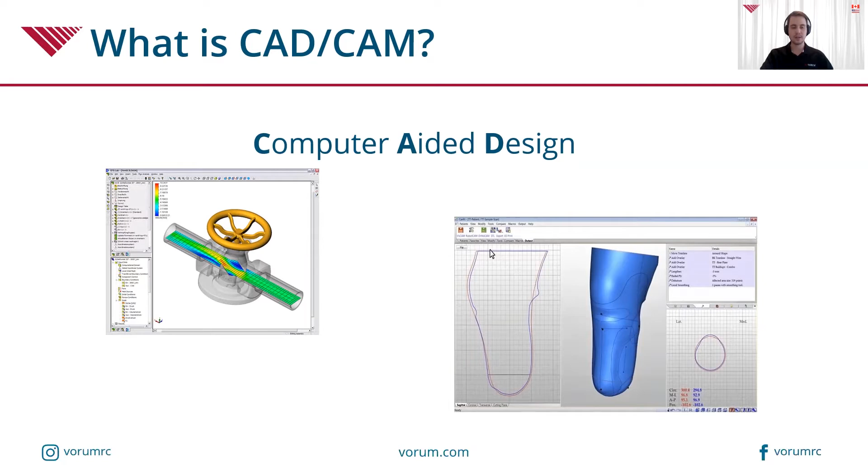Engineers use CAD to model all sorts of things, including fluid flowing from a valve or through a valve. Architects use it to draw and modify things instead of drawing them by hand. And O&P professionals use CAD to design all sorts of different custom orthotic and prosthetic devices.

CAM simply means it's the next step in the process. It means computer-aided manufacturing. CAM programs take the digital shape file from the CAD program and translate it into directions for a machine to follow. Since different machines have different numbers of axes with different dimensions and orientations, it's actually quite critical that the CAM program has been calibrated for the specific machine that it is talking to.

In 3D printing, CAM software is often referred to as slicer software. Together, these form the foundation of a new workflow or even a new business model.

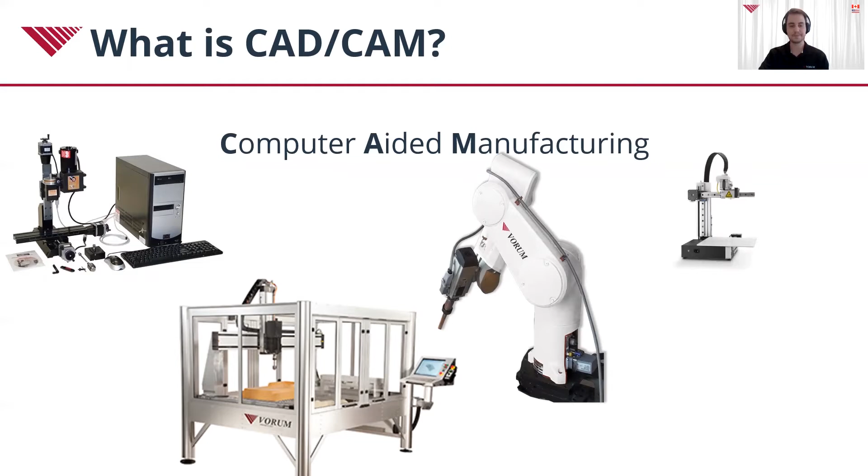As I mentioned, there will be survey results along the way. So we partnered with Dimensional Research. They are an independent third party that specializes in market research to do this survey on our behalf.

So this is especially relevant during and post-COVID. What we've seen is shutdowns, lockdowns. We've had our clients close their business for specific periods of time.

Even though they were deemed essential services, they thought it was best to protect their staff, to protect their patients, and close down.

From the patient side of things, people were reluctant to go outside, to go seek care. People just didn't understand how this virus is transmitted, ways to protect themselves. Now that we're learning more and more about it, people are more willing to go get care. There were surgeries that were not deemed emergency surgeries a few months ago, now they're becoming emergency surgeries. So those patients, they need care as well.

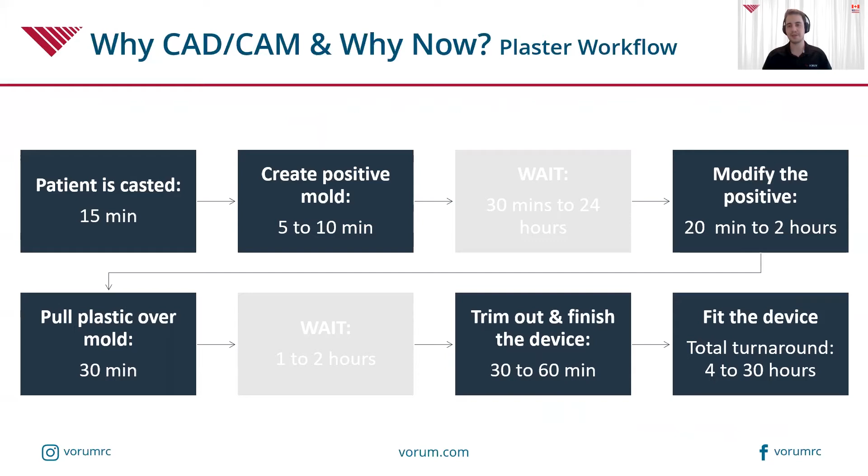When comparing this to the conventional CAD/CAM workflow, we can scan a patient in 2 to 5 minutes, maybe even faster than that, 2 minutes. You can modify that shape and fit it anywhere from 2 to 20 minutes.

New users might say, well, 2 to 20 minutes, I've seen CAD before and it's going to take me a little longer than that. We have our SurePath program that we're going to talk to you about - if you want to be able to modify an AFO in 15 minutes and that's your goal, we'll get you there. We'll do whatever we can to ensure that you achieve that marking.

From there, you carve that shape in 12 to 20 minutes, pull the plastic, wait for it to cool, trim it out, and then you can fit it all in around 3.5 to 5 hours. So for those rural communities, or patients not taking a full day off of work, they're not spending overnight in a hotel - they can get a device in 3 to 5 hours.

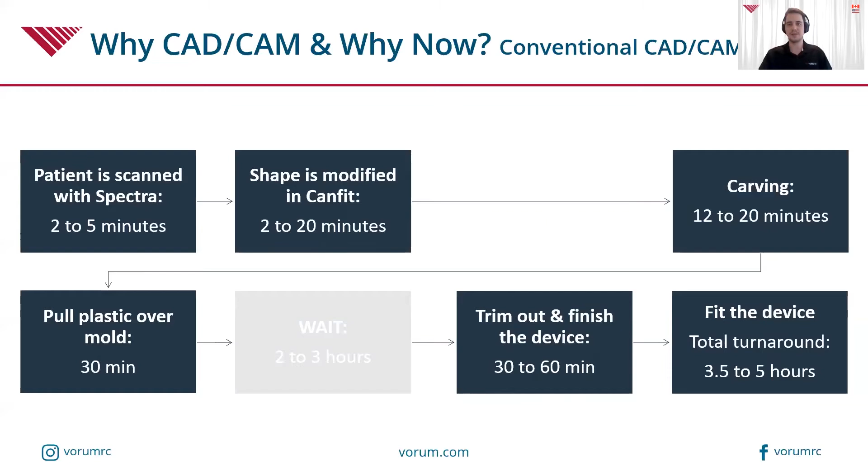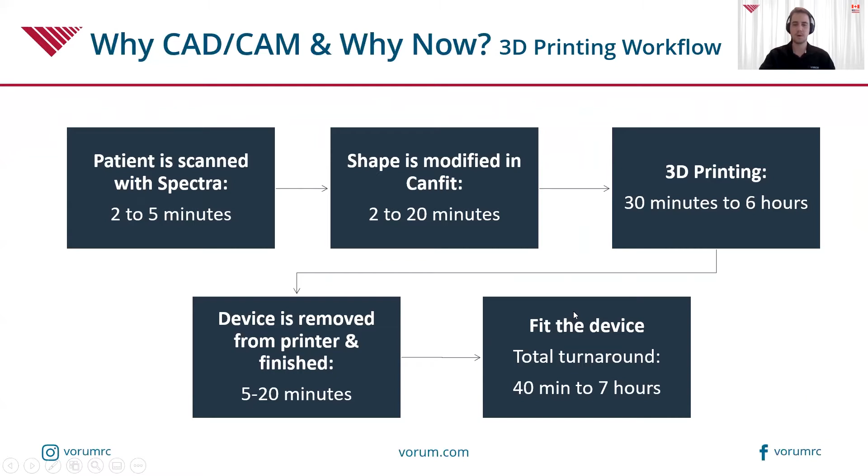To take that even further, if we look at the 3D printing workflow, the scanning and modifying doesn't change. Then 3D printing can take anywhere from 30 minutes to 6 hours, depending on what device is being printed. So you remove it, fit it, and the total turnaround time there is anywhere from 40 minutes to 7 hours.

To summarize all three: plaster takes anywhere from 4 hours to 30 hours, traditional conventional CAD/CAM takes 3.5 to 5 hours, and 3D printing takes 40 minutes to anywhere up to 7 hours.

I know for myself, telehealth, when I'm calling in to my doctor, that's the first step. I'm not showing up, we're having a telehealth conference. I know many of you listening in, that's step 1 too. We have video chat, we can point at things, we can learn a lot just via video chat.

But with CAD/CAM, you have contactless scanning, which can help. You still are within that 6 feet, that range the CDC recommends to stay outside of. But if you think about it, you can take the computer home to do your modifications. You don't have to stick around at the office, you can do a lot at home. So that's advantageous when looking at a CAD/CAM system.

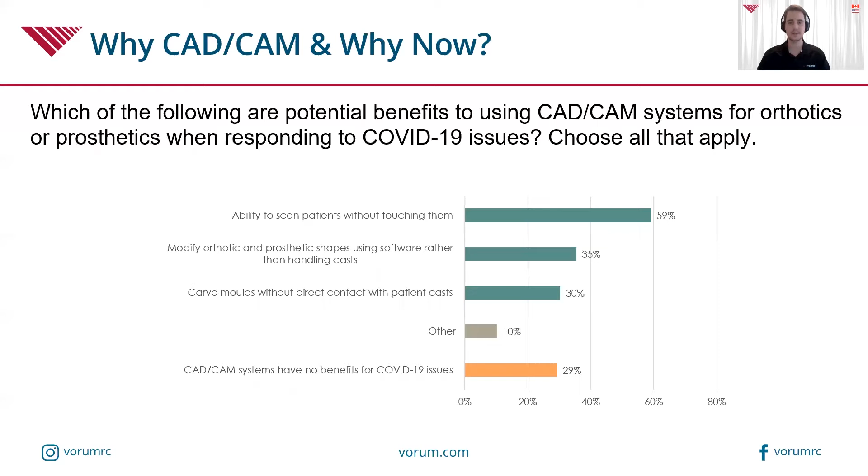But we had nearly 60% that felt that the ability to have that contactless scan, the ability to scan patients without touching them, was very advantageous. You can modify the orthotic and prosthetic rather than handling the cast, being in the clinic, in the hospital. You don't have to do your modifications there, you can isolate yourselves when you're doing that. And again, you can carve the molds without contact with the patient casts. So people definitely see advantages to using CAD/CAM, especially when it comes to COVID.

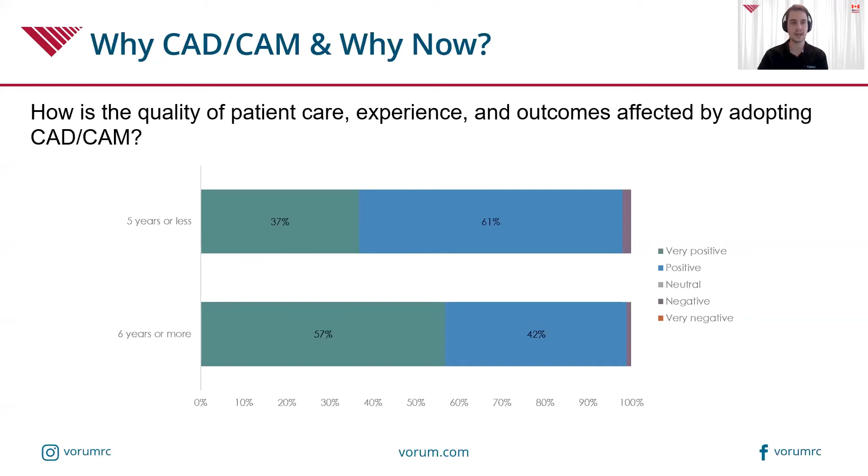And that 98% of overall positive outcomes jumps up to 99%. So really, really positive feedback there on adopting a CAD/CAM system overall, and why it may be better to get into it now rather than waiting a year, waiting 2 years, waiting 3 years, and partnering with a company like Vorum, as we'll touch more on, especially with SurePath and how long we've been around. It is a wise and secure investment of taking this CAD/CAM system into your hospital, into your practice.

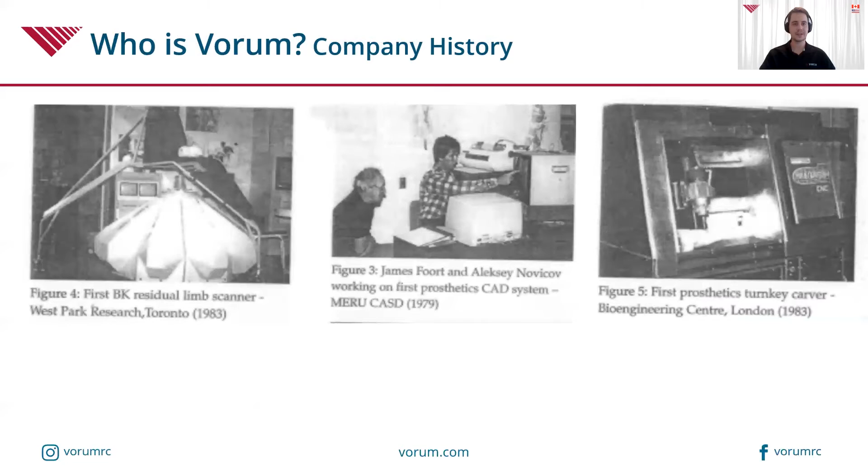So who is Vorum? To give you a company history here: in 1979, Carl Saunders, who some of you listening in may know pretty well, began his research in CAD/CAM for O&P with James Foort. In 1983, the outcome of that research was the subject of the first public demonstration of technology at the ISPO World Congress in London. Crazy to think, over 40 years ago, Carl Saunders was looking at CAD/CAM for O&P, and the first public demonstration was at the ISPO World Congress in London.

So a couple years after that, in 1986, the first CAD system intended for widespread O&P use was showcased.

A couple of years later, Vorum itself was founded, over 31 years ago, to bring the very first CAD system to the O&P industry. When we talk to new prospects, they don't all know that Vorum was actually the first company to bring CAD/CAM to O&P. It's something we're tremendously proud of.

Over 31 years, we have so much data that we've looked at. We have a tremendous amount of R&D that we've done. We've spoken to clinicians, to technicians. We've really evolved our technology so that it's easy to use and has the application for the broad scope of people.

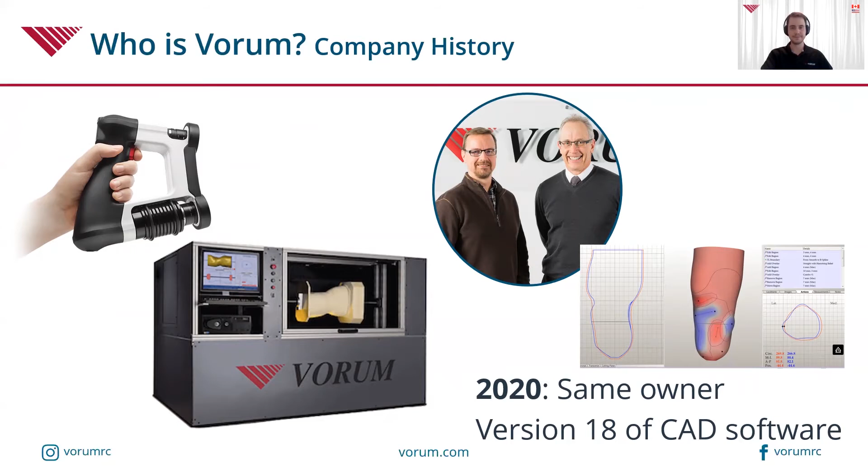Here is a number we are very proud of: every 65 seconds, somewhere in the world, a patient receives a custom device made with Vorum technology. As I mentioned, over 800 installations. We've done this, we know how to do installations, in 45 different countries. So worldwide, we're touching all corners of the globe. We've done this countless times.

So when you're looking at partnering with someone, whether you're a big clinic, a small clinic, private, public, we've partnered with all sorts of different institutions. We know what it takes to make you successful, especially for new users, especially for people who are a little hesitant to make that jump. It is a jump, it's not the same as plaster. There is a learning curve, but with our SurePath program, with our 31 years of experience, you're really partnering with a company who knows how to do it, and knows how to do it right.

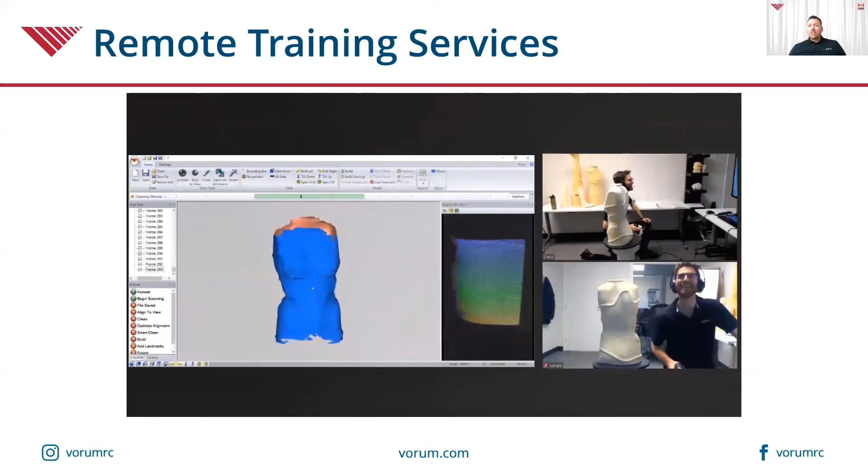As an organization, we've been successfully delivering CanFit training for several years now as well. We recently did some reorganization in our office to create dedicated remote training spaces for our Spectra scanner, as well as additional resources for delivering training on our carvers. We've already delivered successful trainings on our scanners, our CanFit design software, and our 3-axis carvers and robot carvers to customers around the world. Rest assured that with a remote installation and training program from Vorum, you're going to get the customized training program you need to be successful with our products.

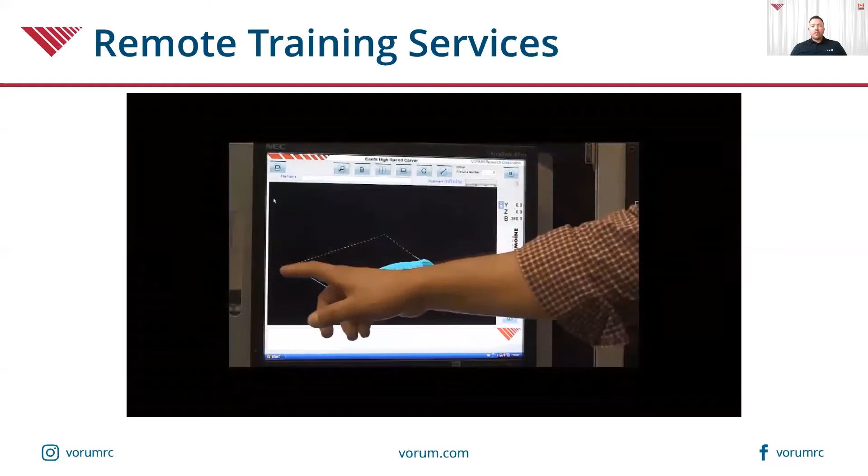Leveraging our experience in the industry, we've ensured that we're able to deliver and train on our scanners, software, and machinery remotely at the same standards that you've come to expect from our on-site training. This includes training on using our more complex machines, from our 7-axis carver through to our easier machines like the 3-axis carver.

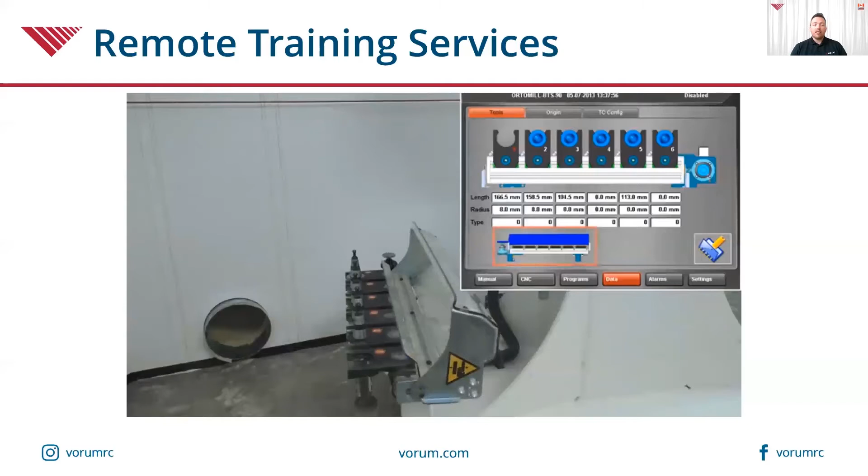We've also set up new resources in order to be able to train you effectively on how to use our various machinery. For example, we can train you on how to use the touchscreen interface of our complex 7-axis robot carver, and we can also train you on how to use the different interfaces of our other carvers, such as the 3-axis carver, so that you can be successful with all of our products after our remote installation process.

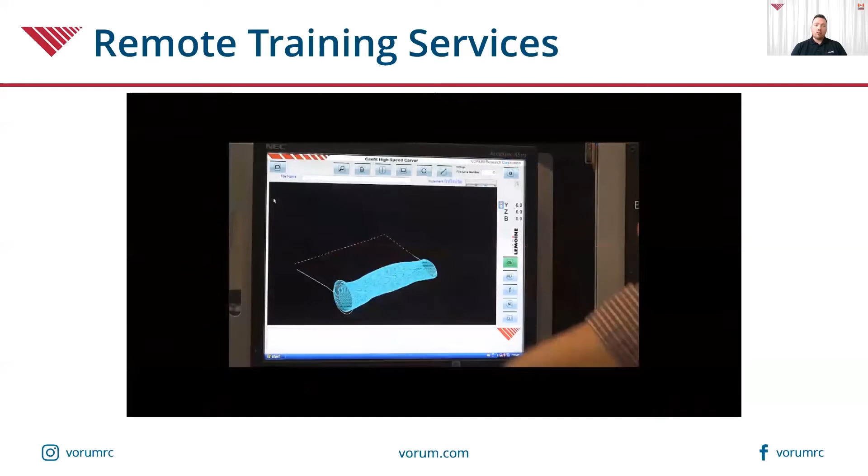Once your remote implementation program is complete with our implementation team here at Vorum, you'll have finished all of your training and be away to the races towards your goals. The next stage of the process is to have regular check-ins with our customer success lead, Brian, who you're going to meet next, and we'll follow up after those check-ins with any targeted support or training that's required to make sure that you achieve your goals.

Hi, my name is Brian Cutt. I am the Customer Success Lead for Vorum, and I'm here today to talk to you about customer success at Vorum. Before I dive right in, I do want to say thanks to Bob Orlando for an excellent presentation on the different delivery options and the products that we have here at Vorum, as well as for touching on SurePath.

Today, I'm going to be talking with you a little bit more about SurePath, different success stories that we have from organizations that use our solutions and have found some way that SurePath has helped them along the path to find success, as well as to talk to you about support, the ways that we help you get on with your day-to-day business when you're using our solutions.

A little bit about me first before we begin, so that we're not strangers. As I said, my name is Brian Cutts. I have been working in the account management, business development, and customer success fields for close to about 5 years now, working in water data management, and I'm very blessed to be working with Vorum now since the beginning of this year.

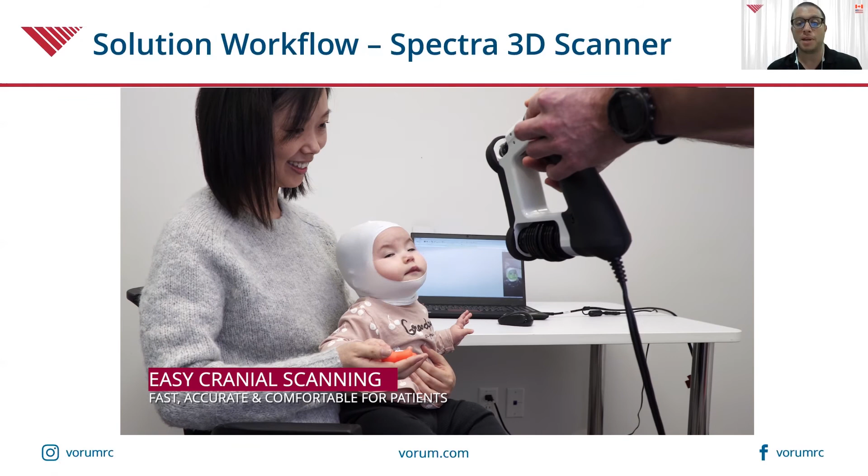So diving in, here's a video showing the Spectra scanner in action. The Spectra scanner is lightweight and durable. The scanner and laptop fit together in a single backpack, so you can easily take it to the hospital or clinic. The Spectra can be used to scan everything from head to foot, including infants for cranial remolding helmets. The Spectra doesn't require any special stickers or proprietary stockinette to get an accurate image. Its blue light makes it great at capturing patient data in varying lighting conditions.

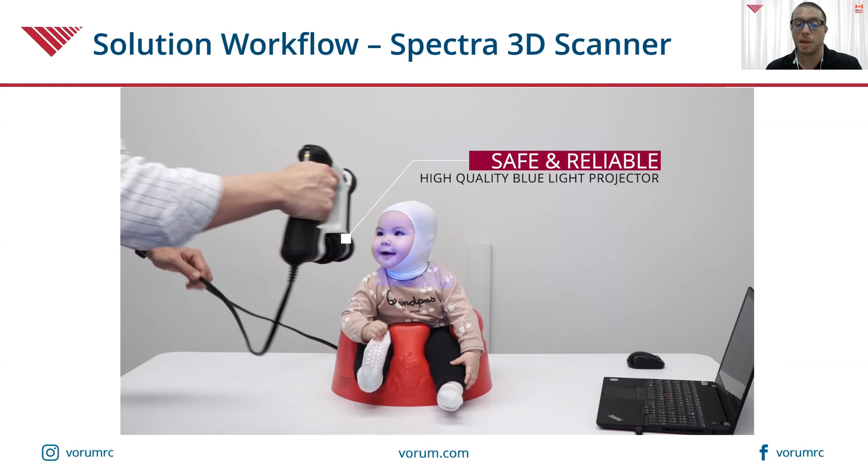It also allows you to stop and start from multiple positions on the shape without having to go back to the computer. As I mentioned, it also picks up any marking on the shape, so it's easy and precise for making landmarks that will guide your design in the CanFit software.

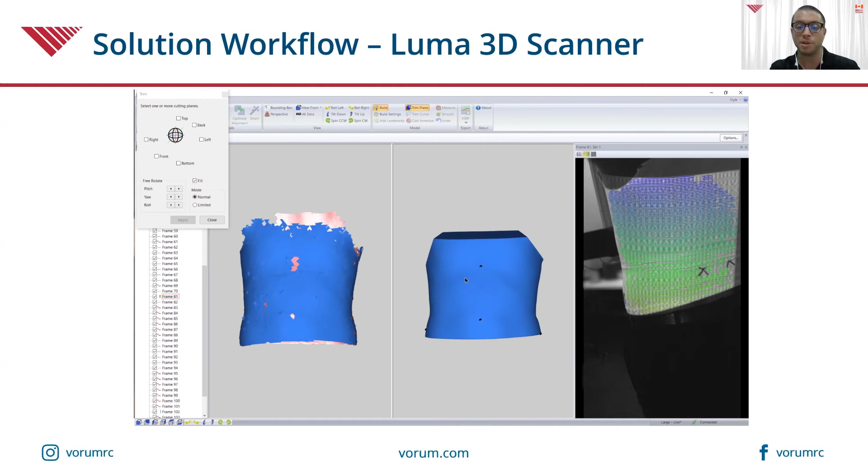Next, moving over to the Luma 3D scanner. This scanner integrates with the Microsoft Surface Pro tablet for a wireless scanning option. The Luma uses infrared depth sensing technology to generate both the 3D shape information and the texture image. Aside from the fact that it's wireless, the software interface we've put together is very simple, so it's easy for any practitioner to learn quickly. You can use the touchscreen to clean up any background data you don't need and to align the shape for export to CanFit.

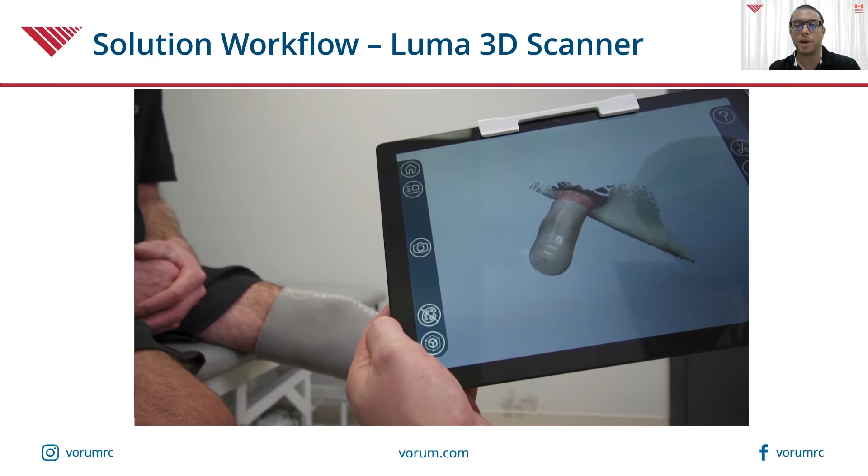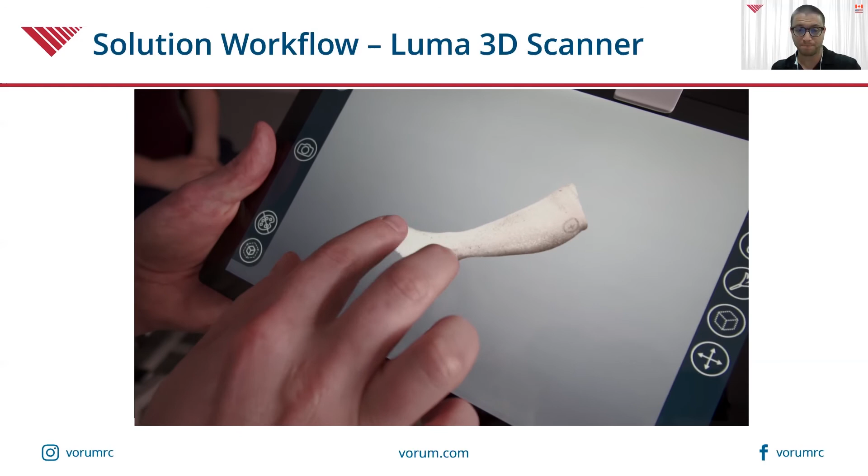The Luma is more accurate than similar iPad scanners on the market. However, it's still not as accurate as the Spectra, so it's not recommended for cranial remolding applications. What is great is that it's possible to install our CanFit design software on the same Surface Pro, giving you a completely portable solution for shape capture and design on the go. Another advantage of running on a Windows-based platform is it can work with your IT department's security policies to provide a much more secure

solution to store your patient data. Compared to Spectra, another difference here is that the Luma scanner pricing is scan units based, so you pay as you go. Currently, Luma is only available in the United States through Friddle's Orthopedic Appliances.

Here's a quick overview of those two scanning options again. The Spectra is the ultimate in accuracy for patient scanning, meaning you can have confidence in scanning everything from head to foot, including infant cranial remolding helmets. The Spectra is portable, meaning you can take your laptop and Spectra on the go and have it set up and ready to scan in seconds.

The new Luma scanner is completely wireless. You get full shape detail, including the texture image. Because it runs on the Surface Pro, it's a secure alternative to iPad scanners on the market. It can run the design software and is pay as you go.

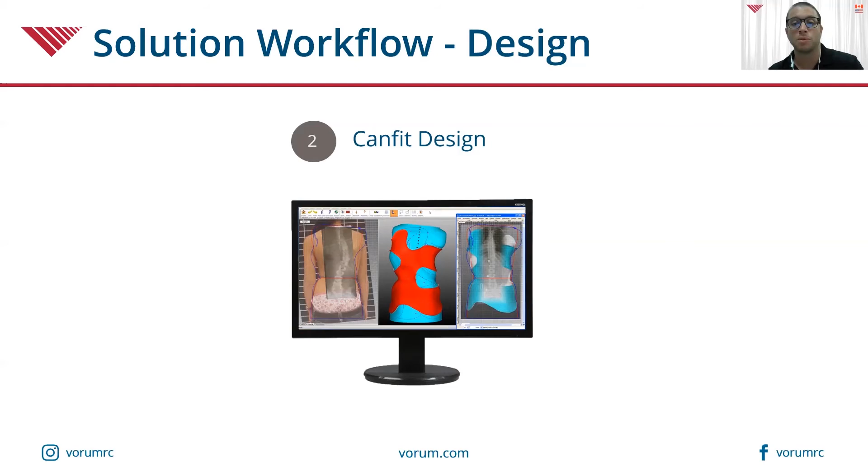Jumping into CanFit now, I'll give you a brief overview of the software, and then we'll actually have time to go into some real-world examples highlighting many of the features and tools of the software for both some prosthetic applications and some orthotic applications.

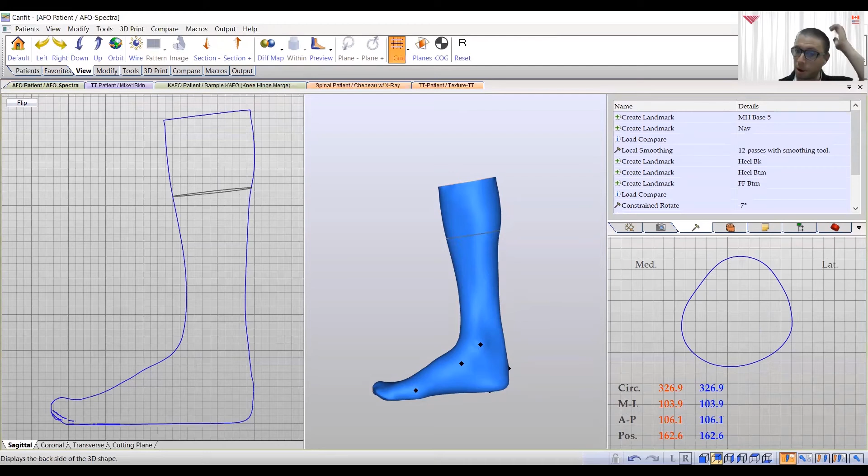At the very bottom, we have some easy views, so we can click front, back, left, right for an easy way to get to those angles of the shape. We also have other ways to break up the screen with different orientations and window configurations, so if you're modifying and want to see the before and after in a plain 3D view, you can use the window configurations in the lower right to set that.

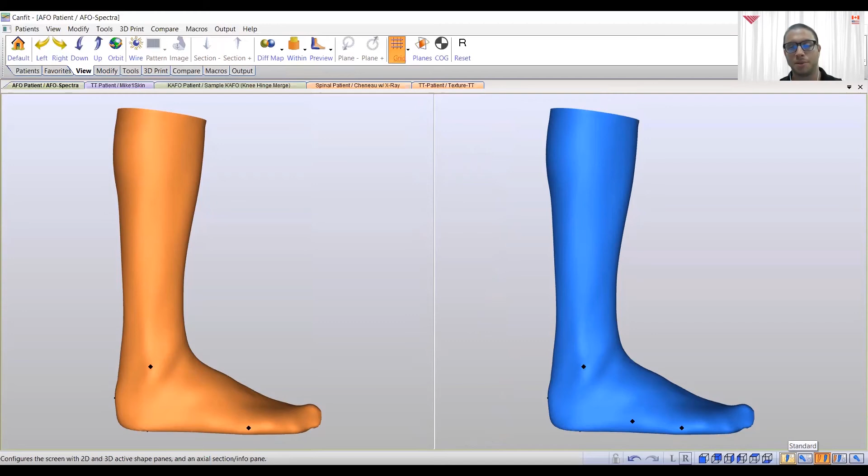So this is how you can navigate in the software. You have different toolbars depending on what you're doing - a lot of the time you're going to be in the modification or tools toolbar. I'll give an example of a few of the key modifications we'll do.

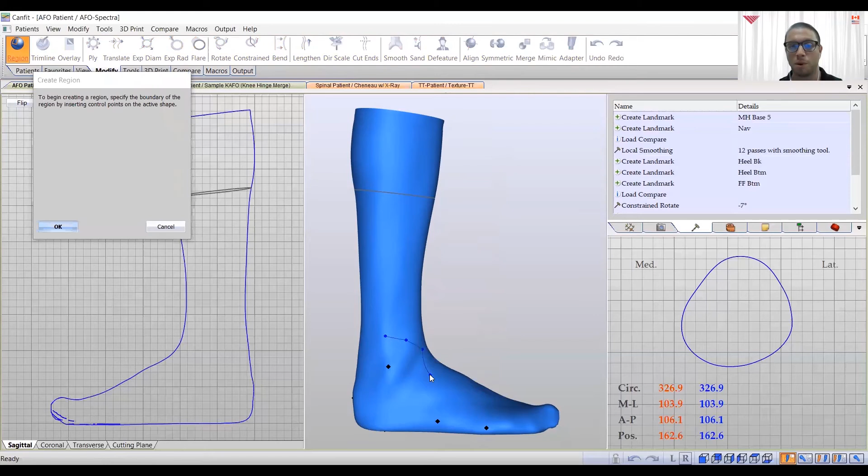So the most basic one here is a region modification - this is where we're going to be doing a buildup or a pressure. It's a really easy way to just click several points on the shape to define that contour, and then click an apex point, generally on a bony prominence or an area where you want to create an area of pressure.

With this, we just click a few buttons to set the height of this buildup we need. You can see here on the right what that looks like. The nice thing with this is you can not only set it here, you can also click and drag to set a height for that region where it looks good.

So you can see it's easy to draw any kind of custom buildup anytime you need. But what is really powerful about the software is that once you are happy with the designs and how they fit on the patient, you can standardize those. Not just for one individual buildup, but a whole set of modifications for your patient.

If I right click here, I can remove this modification, and I'll show you what that same kind of modification can look like as an overlay. An overlay in CanFit is a standard set of buildups.

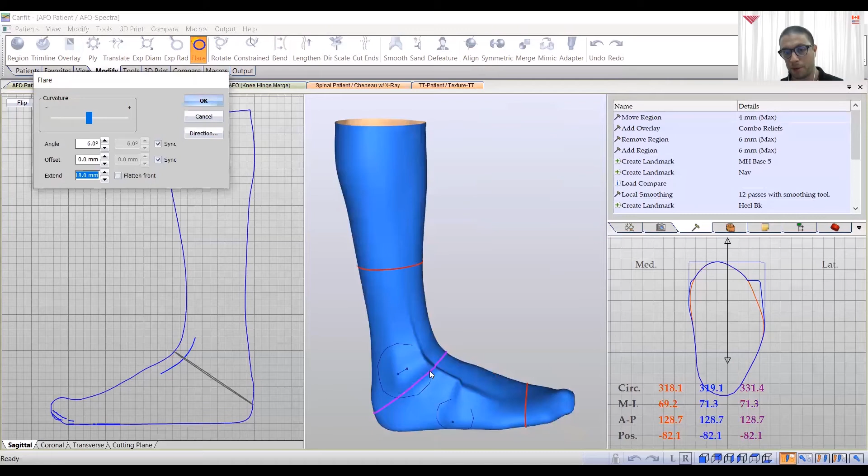Another nice feature is that if you don't want to project all the way to that anterior surface level, we can bring back this extension, and you see we can get some of that projection straightforward, but then it stops and leaves you with the original anatomical definition at the anterior side of the foot, or the dorsum of the foot. So with this one tool, we can replace many minutes in a plaster shop getting this kind of feature done. It's also something that can be easily standardized across practitioners.

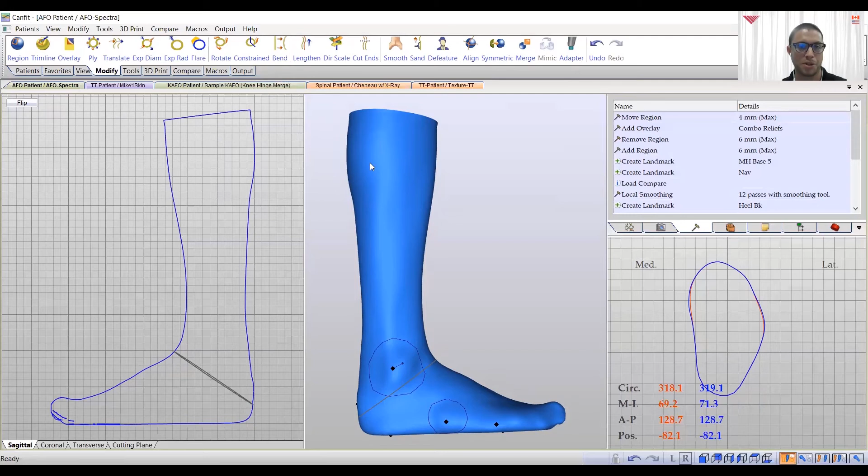A few other powerful tools we have when talking about orthotics are realigning the shape and adjusting angles from how we may have scanned or positioned the patient during the scan. Bend is really easy to use to correct some of that plantar flexion, dorsiflexion. With this bend tool, I create the bend point and a boundary, and then I can simply click and drag until I get that shape in the alignment that I need. I can see here in my two-dimensional view where I started and when I finished.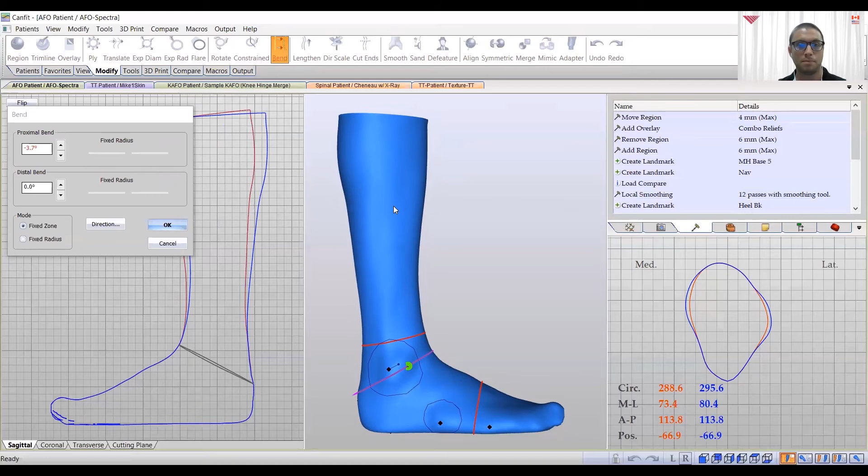If I want a specific bend, I can apply it here, but I think closer to where we started is probably fine.

These are the kind of modifications that are very easy to do in CanFit, not only bending but also rotating. For example, if we need to de-rotate the heel to get it in that subtalar neutral position, we can just use the rotate function. With the rotate, we select the apex of that rotation and then two boundaries, and then it's very easy to click in the axial view and drag. You'll see when it looks right, when that subtalar joint lines up nicely with the angle of the leg and the position of the foot.

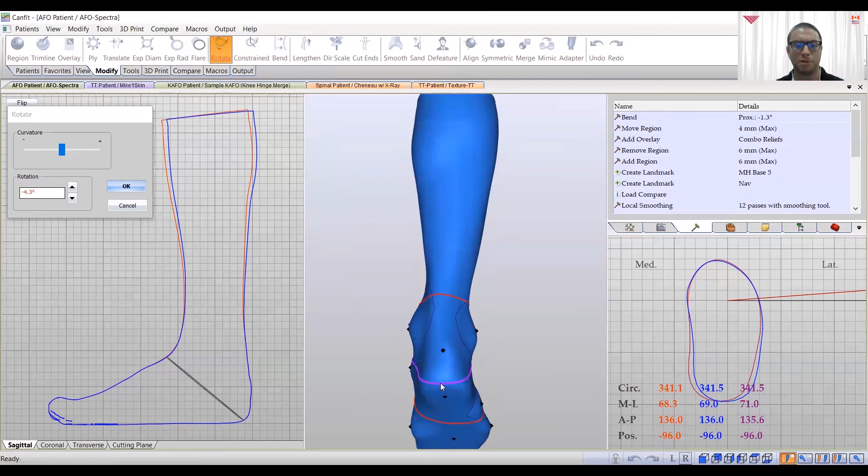Another standard modification for AFOs is the toe box. I'm going to use this example to highlight maybe one of the best features in CanFit, and that's what we call macros. Macros are a saved set of modifications that everybody in your organization can use.

In this case, we're going to use it to create a toe box. Here I just load one from my saved list of macros. I come into this window, and I can see a preview of all the steps we're going to have in this macro. Another nice feature of the macros is that you can build instructions to yourself or to your colleagues that might be using the macro.

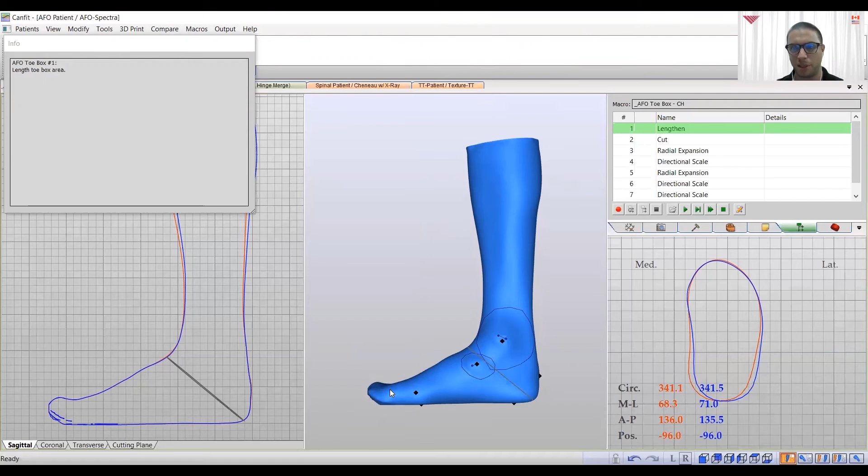Here, the first step instruction is to lengthen the toe box area. Rather than adding a bunch of plaster as we would in a plaster workshop to add out the length of the toes to fill in the shoe area, we're just going to lengthen the data that exists from the scan.

So I click play, and you can see it's going to lengthen the shape out. It's going to be more than we need, and we're going to cut off the toe detail just to have a nice square toe box area.

Now the macro is already preset with a determined length of extension, and it's also located on a landmark that I've specified, so there doesn't have to be too much guesswork. The other nice thing is as you're modifying through your macro, even the view will update to show you the most important view to be looking at to decide if you have a good modification.

While the macros are great to have consistency across practitioners, there are still situations where patients will need a bit of a custom adjustment. So we don't necessarily recommend that you just go ahead and blast all the modifications onto the shape without a little bit of review at each step.

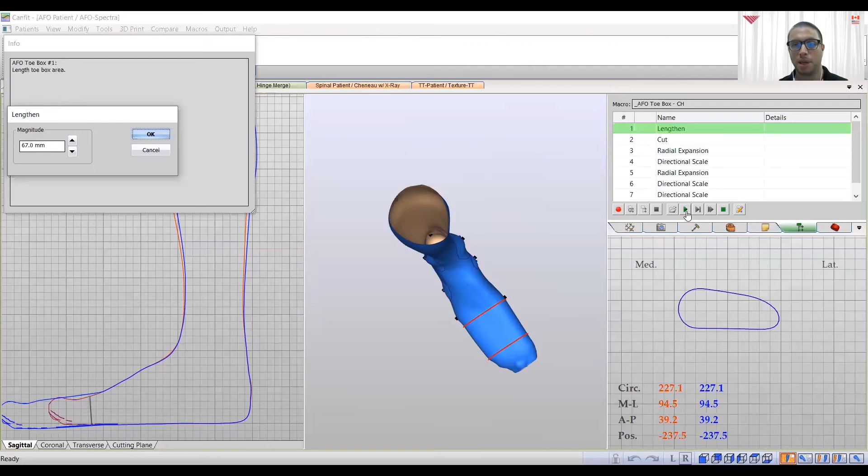It's important to use your clinical knowledge to know how much is good, but the nice thing here is we're not forgetting steps, and most of the guesswork is taken out. So here it's preset at a certain length, and if I'm happy with that, I can just click play to go on to the next step.

At the top left, I have AFO toe box number 2: cut the distal end to remove the toe detail. Again, the second step is going to guide me through that. I can see here how much I want to cut off from the 3D shape, and I can click and drag to cut off a little bit more or less. I can also see in my 2-dimensional view how much I'm cutting off relative to the original toe of the scan.

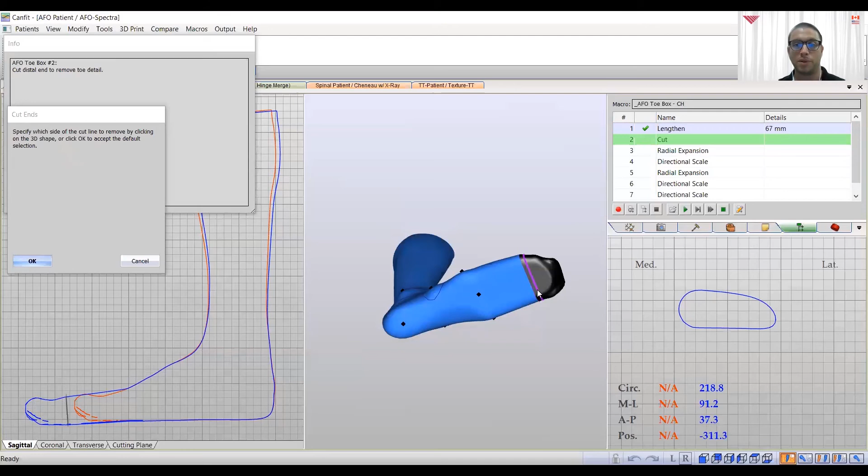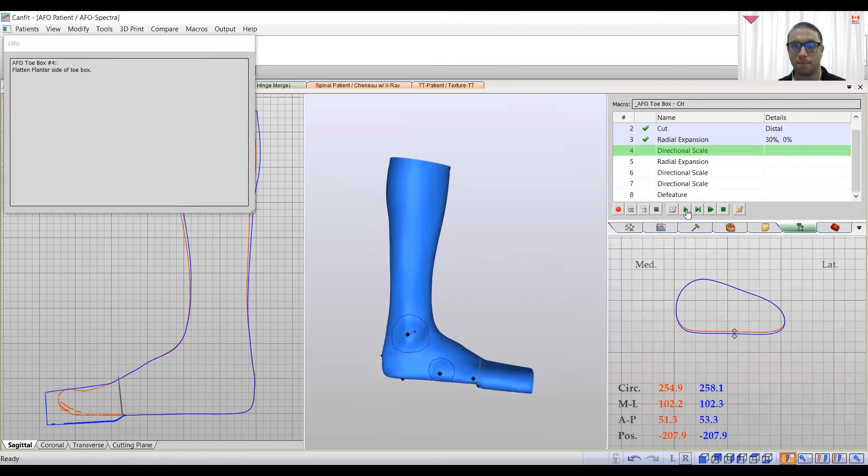To ensure I'm getting a nice squared off edge on the plantar side of the toe box, we extend out this data in this next step. And then finally, we can basically flatten the whole bottom of the AFO to have a nice, consistent flat surface.

There are some additional steps that we can take, but at this point I'm satisfied with that toe box, so I'm going to click stop to end that playback, and I can move on to any other specific modifications I need to do.

For macros, you can have them set up to do as little or as much of a modification process as necessary. It's often good to have a standard set of basic modifications, for example smoothing up a scan, doing some basic alignments and some general build-ups, the kind of things you'll apply to all of your patients for a certain kind of AFO. Then you can have additional macros for some of those finishing features that make the different types of devices unique.

So for a KAFO, for example, a lot of the AFO portion might be similar for a lot of the AFOs you're doing, but the KAFO you're going to need some specific things around the knee, or maybe specific differences for the trim line. So you might have a general AFO macro, and then for a KAFO there might be a second macro you use just to do some of those adjustments around the knee area or the thigh area.

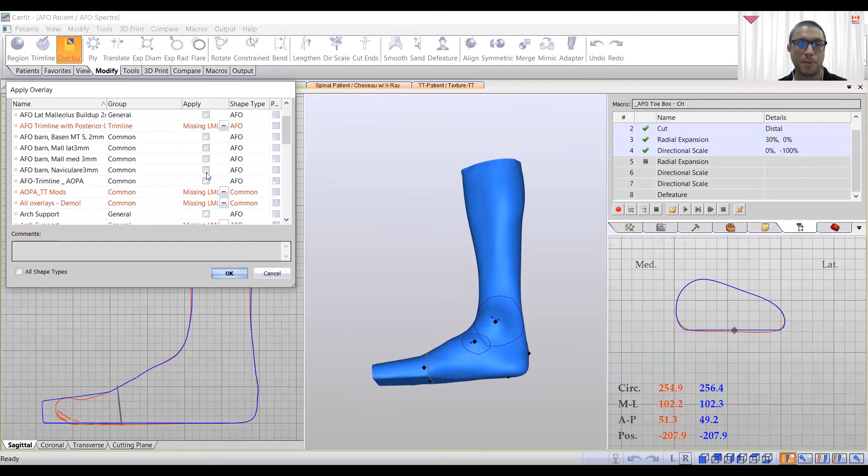We can draw a custom trim line every time, but of course that's a bit time consuming, so we like to save these into overlays. Here's another one that we have. I'm going to find a trim line that I like, check the box, and apply it to my shape.

You can see this is the trim line that's extending around the shape. It's a fairly standard trim line. Once it's on the shape, you can adjust it as much as you need to. Just like we did with the regions, we can resize and move, lengthening the distal end or the proximal end to see how high we might want it.

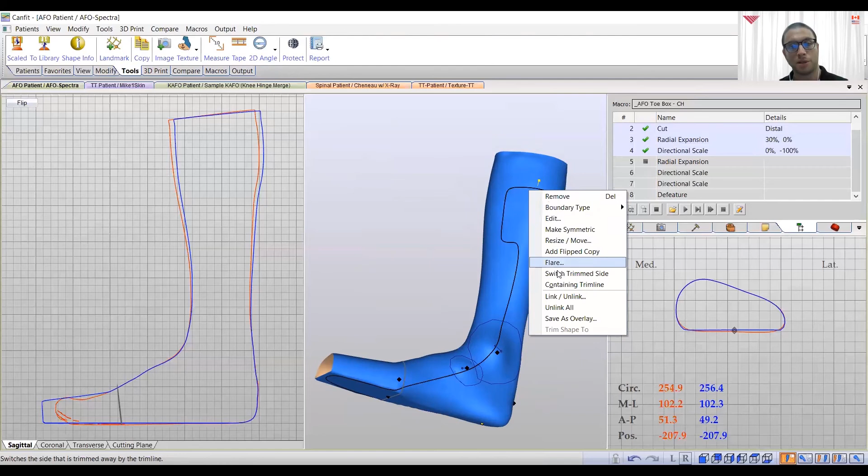Anytime you want to do a measurement, we have measurement tools. So if you're considering how high you want that trim line to be on your AFO, that's something you may have measured on the patient during their visit. You can draw a measure right in the shape, and let's say 380 was the height the brace needed to go up from the floor. We check the box for the Z, the vertical component of this measurement. That measurement stays on the shape, so now I can use that endpoint, which I know is 380, as a target, so that when I drag this trim line up, you can know and have certainty that it's at the correct height.

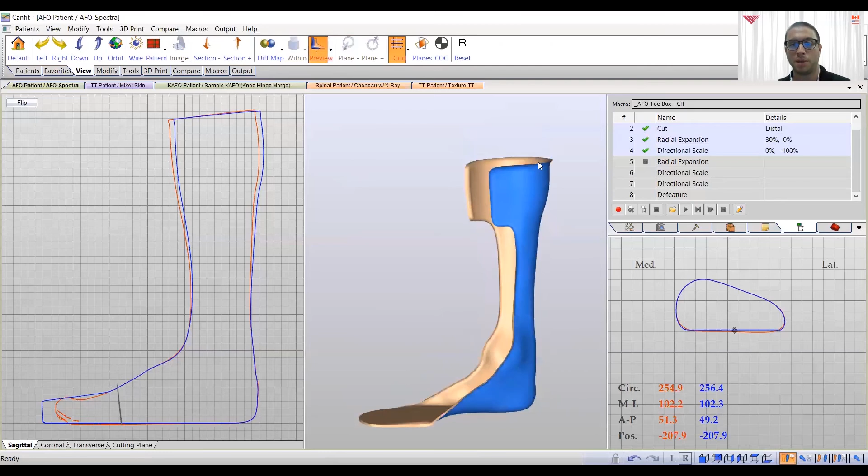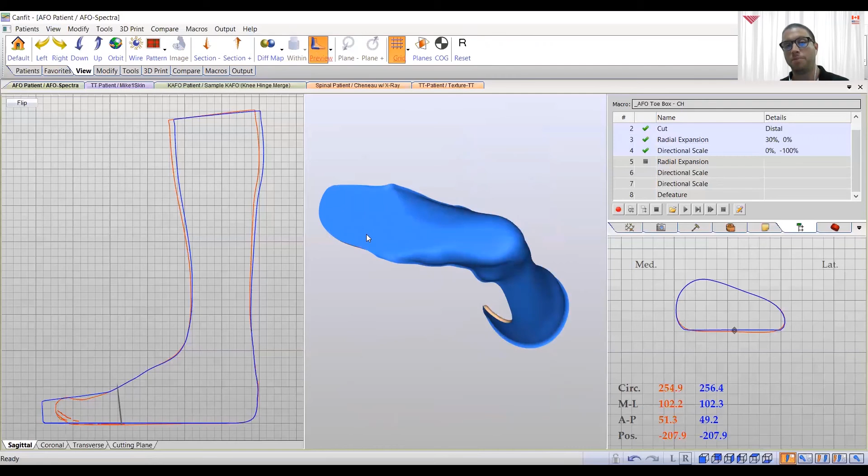What we don't see in this view is the flare of the trim line. To see the flare, we go into View and Preview Device, and here we can see what that flare edge looks like. In this case, we have a small amount of flare around the midfoot and ankle, and at the proximal edge, that flare is a little bit larger. If we go down to the forefoot, there's actually no flare, so it's very flat there because we don't need it to flare out — the toe box is already a bit wider than we need for the patient's toes.

So from that, if I was going to be carving this shape, that might be all I need to do. But I will show you some of the 3D printing tools we have available. Once you have your positive model designed, it's really the inner surface of your device. If you're going to be 3D printing, you can then apply some tools to make this 3D printable.

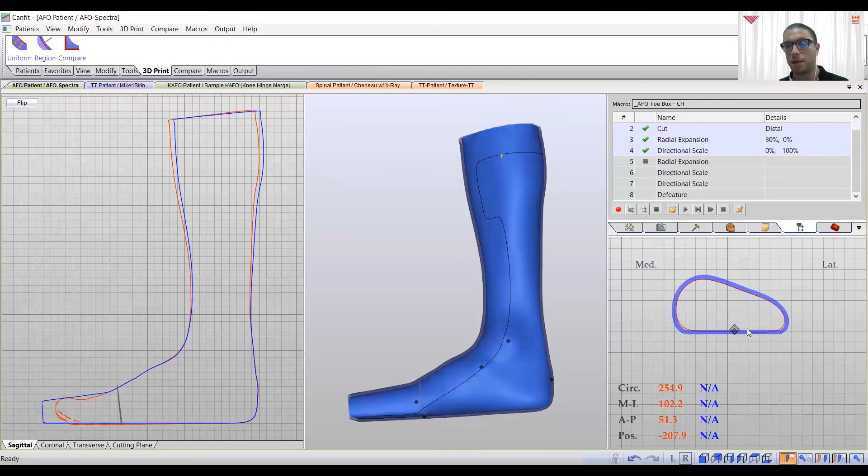The first thing we need when 3D printing is to make a thickness. We have a 3D print tab here, which gives us access to different tools. The first thing I might do is set a uniform thickness, like a default thickness all the way around the shape. Maybe 3 or 4 millimeters is appropriate — let's pick 4 and say OK. When you pick that default thickness, you can see in the axial view that blue shaded area, showing the difference between the inside surface and the outside surface. If I zoom in here, this shaded area is the thickness of the device I'm going to make. And if I preview my device again, I'm now seeing that preview with 4 millimeter thickness applied.

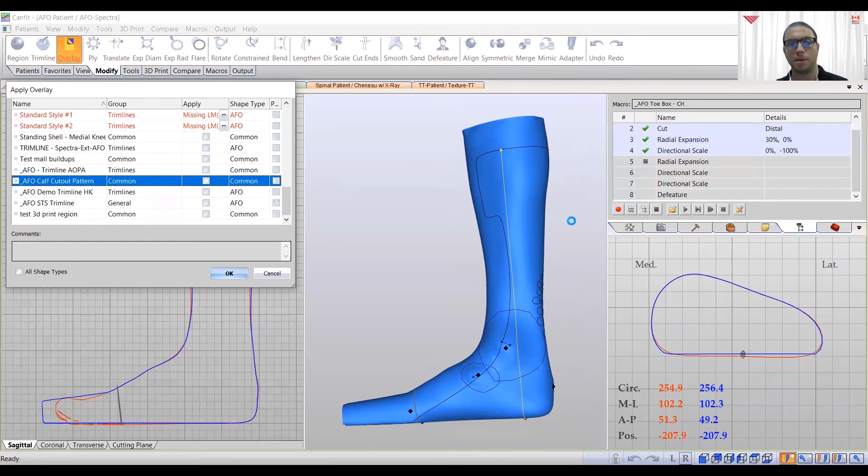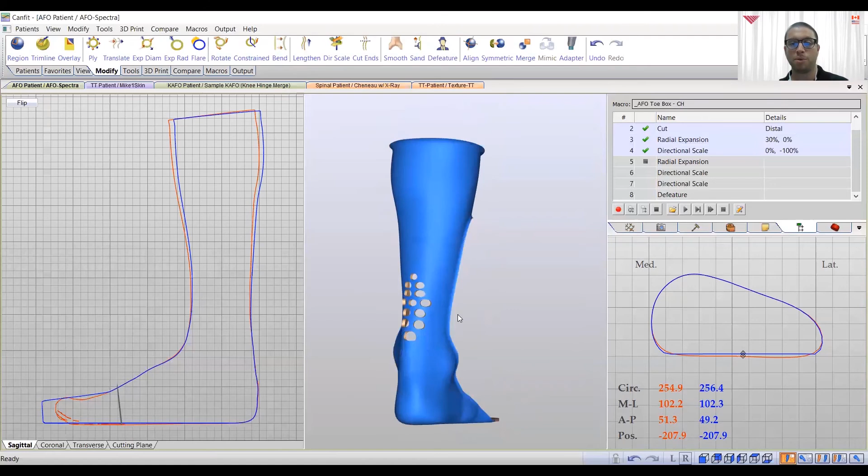One thing that's really handy with AFOs is to be able to design right into the device specific cutout patterns. We have overlays that work for that, so I'll find in my overlay list a pattern of cutouts. This is simply a series of overlay cutouts, and you can design these to be anywhere you wish. In this case, it's going to be around the back of the ankle, giving a little bit more flexibility and breathability to the device in this area. Now with the preview, you can see what that's going to look like.

Now this shape can be exported and sent off to the 3D printer, or without those 3D print edits, we could send them to a carver to be machined out of foam.

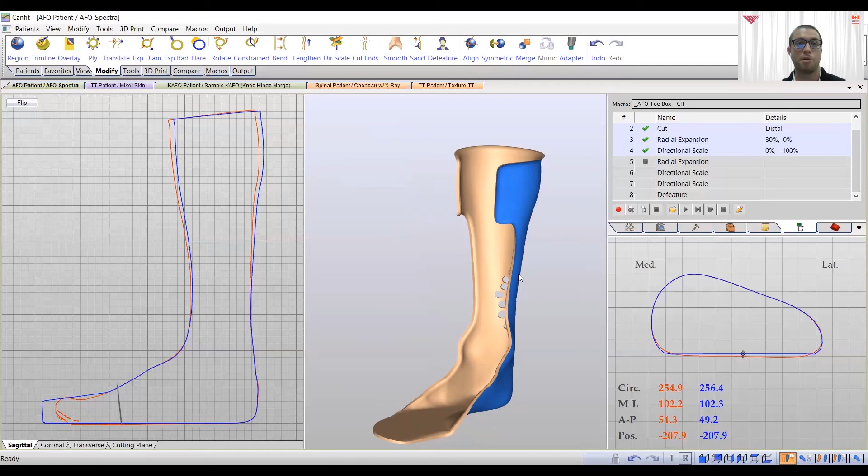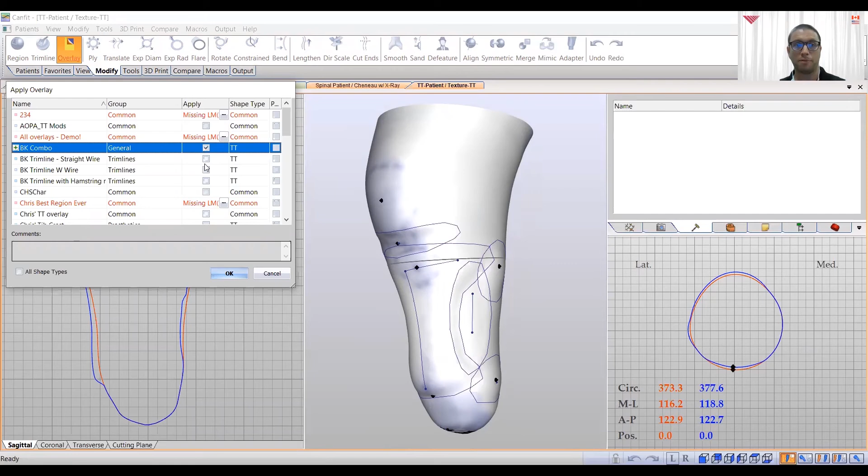So now I'm going to skip over into prosthetics. Here's an example of a scan of a transtibial patient. We can apply all those same tools I just used for AFOs for doing buildups and pressures and trim lines, and you'll see that here very quickly. So here I have a combination of buildups and pressures, and I also have a trim line I can provide on the shape. In this case, you can see I have a scan of a patient with a bunch of markings drawn where I want to have my MPT and the landmarks and the patella defined.

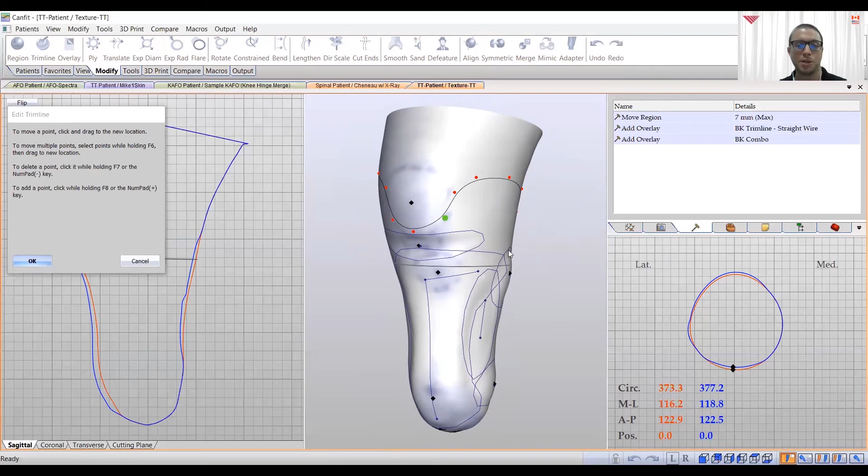I also may want to make some adjustments when I put that overlay on the shape. Here I may want to adjust the trim line as it came in, based on how the image or lines were drawn for the patella for this patient. So you can use that manually drawn indication during your patient visit, before the scan, to really guide you through the modification process.

You have the same access to all the same tools that we had for AFOs. That's one nice thing about CanFit - once you learn the tools for one device, you can apply them to all the other devices that you produce.

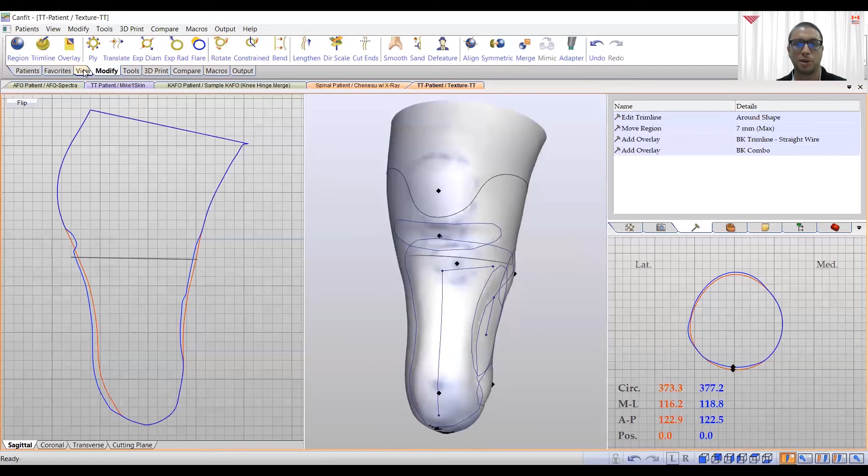Once you use that texture image to help dictate the modifications you're doing, I often like to turn off that texture image. So we can just go to the View tab and turn that off, and then it's a little bit easier to see what that positive model is going to be looking like.

A unique feature of 3D printing that we have here - we start with the same adjustment, setting a standard thickness. You may want to have an area with more thickness. So once we set our default thickness, we go back into uniform and we can create an area of more or less thickness with these constraint planes. I can set a zone below this plane, increase the thickness, let's say to 6, and then I have an area of 6 millimeter thickness distally and tapering up to 3 millimeters proximally.

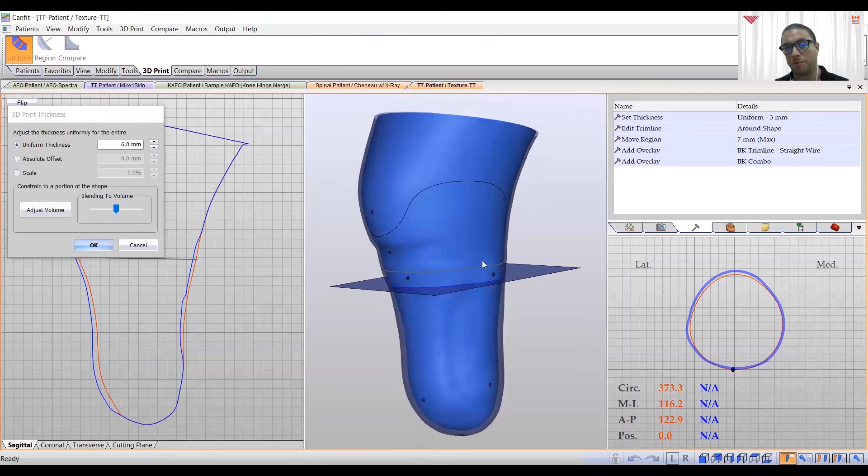We also have the ability to design thickness regions. This is just like a region buildup that I showed earlier, except here we use it to design the thickness in a certain area. So if you want an area of thinner material, we design a boundary like this, and then we specify the height of these points.

And then we can see how this tapers down. In that top area, you can see that it will only allow a 1 millimeter thickness because we only started with 3 millimeters thick, so we can't go less than that. And where we had 6 millimeter thickness distally, by reducing 2, we're now resulting in 4 millimeter thickness. You can see how that looks as you click through the various control points.

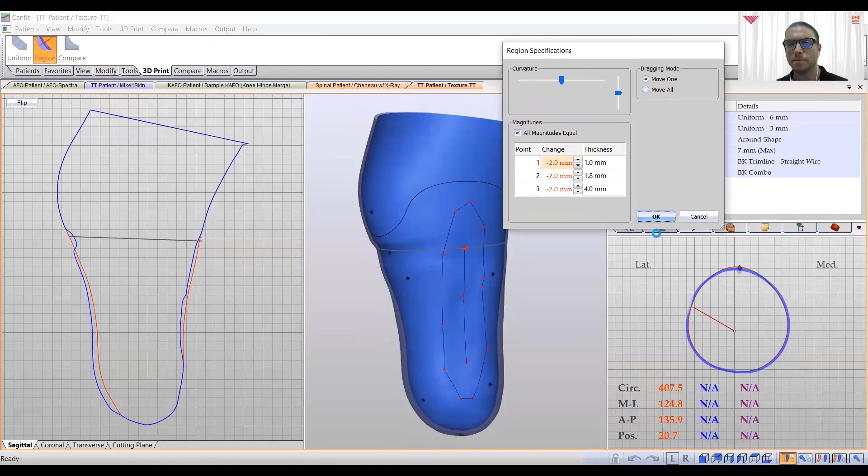Another nice feature with CanFit and our 3D printing capabilities is the use of components - this is the term we use for adding additional features or fixtures to your patient shape. So to the socket in this case, we may want to have a distal adapter. We have a selection to choose from for this shape type. Here you have a cylinder that you'd be able to just screw in from the bottom. We have other shapes and other types of attachment pieces.

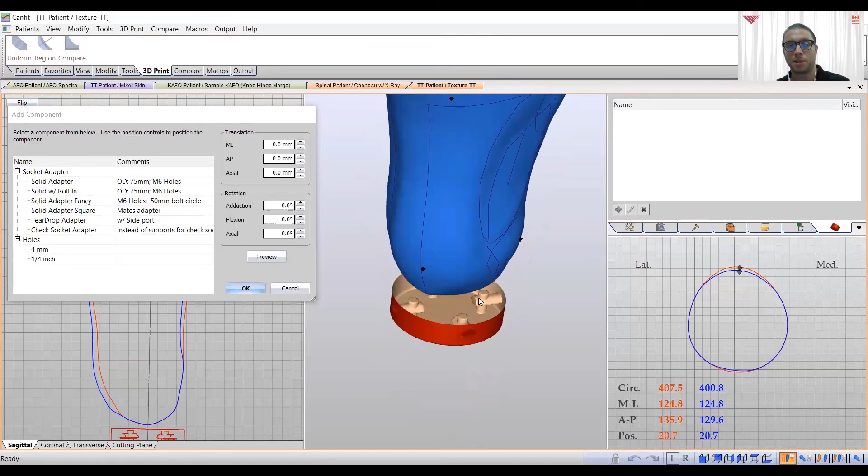So here's one - if I zoom in, you can see the ability to use slotted nuts to go in there to screw in from the bottom. So you have a variety of options to use for your device.

Once you're happy with the device or component selection, you can then position it as you need to. So if you need to angle the position more medial or lateral, you can do that here, or also adjust the angle.

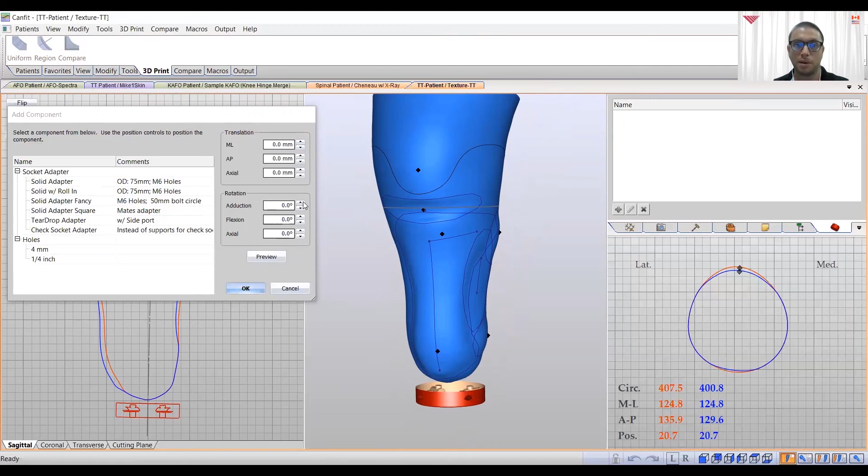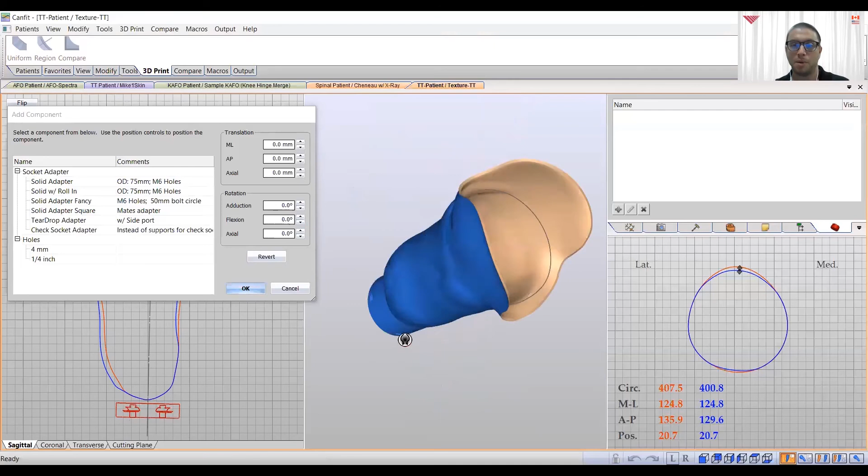Once you're happy with the angle, we can preview what that's going to look like, and it will render that full 3D shape with the component added - in this case, it's the distal adapter. While looking internally in the socket, you can see it's still that nice smooth distal end that we had from the scan of the patient. So you have that nice intimate fit throughout the socket here for your patient, but it's also integrating with whatever componentry you have outside the device.

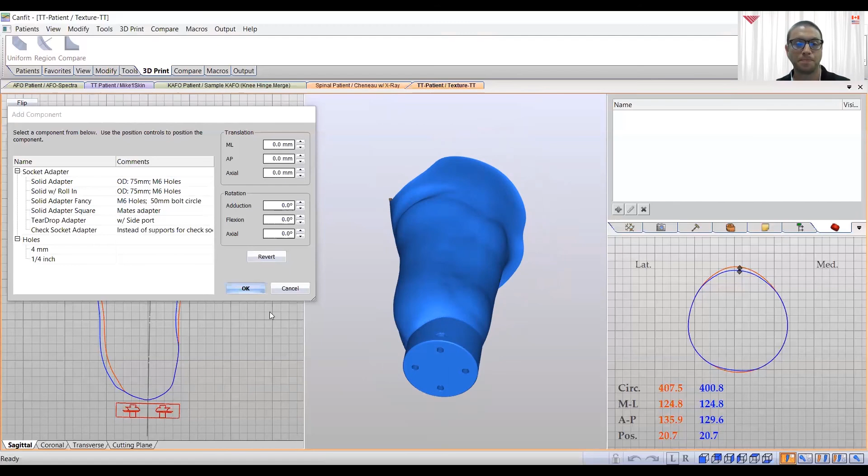I'll touch on a couple other features here. So with your socket design you've done now, you may be required at some point down the road to make a new socket and justify that another socket is necessary. So what I did want to show here is if I pull up an old scan of a patient, for example, this scan here, you can overlay those two scans.

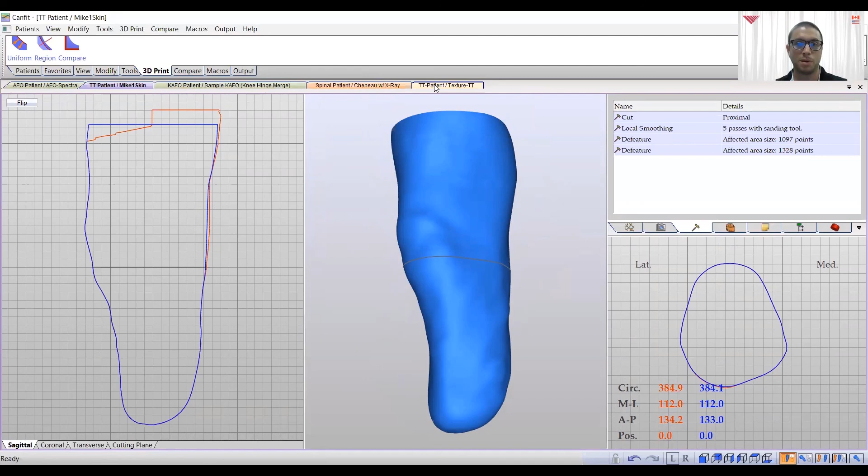So I basically just copy from this one and paste onto this one, and you can see those two scans are now overlaid. And we can align those two shapes appropriately, because what I'm going to do is make a report on the measurement differences between the two shapes.

So I have a macro that I can use to apply several measurements to my patient - I have several circumference tape measurements throughout the shape, which is, as you can see, very quick to drop on. And if I look at my measurement tab here, which I showed you earlier, we have all of those tapes listed out, and at each level, you can see the difference in the size from one to the next.

And this is great, but if you need to share this information with people outside your organization, especially a third-party payer, then it's nice to be able to just fire up a report for this. So we're going to go into Tools toolbar and Report, and we're going to do a measurement report. And the initial 3D compare shape is the red shape outlined here - that will be the one comparing to the one in blue.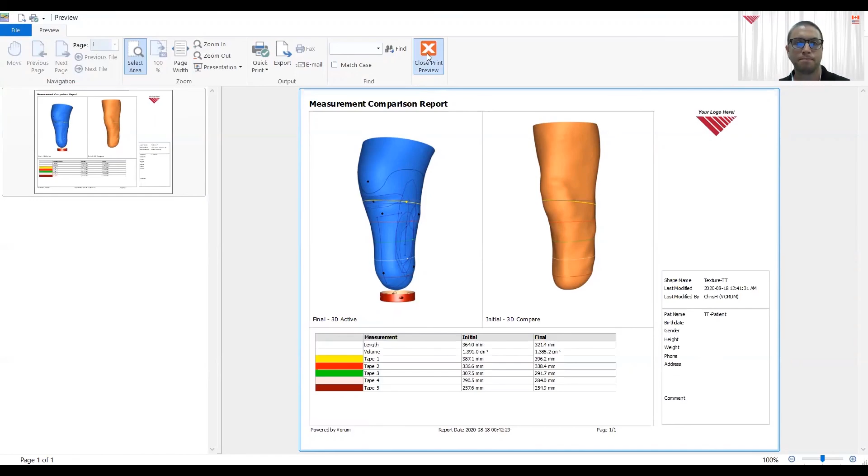The other thing I thought would be interesting to show is the ability to work with digital photographs or images. As you saw, we can import a texture image with the scan from Spectra or Luma, but you don't always have that. So in some situations you want to use a digital photo or a digital X-ray to align with the shape and help guide your modification.

Here I have a spinal shape I've already scanned. We've even landmarked the vertebrae, and we want to apply the X-ray image on the left to our 3D scan model.

So here I'm going to go into Tools and Texture, and select which of my two images, either the digital photo of the patient or the X-ray, I want to turn into a texture.

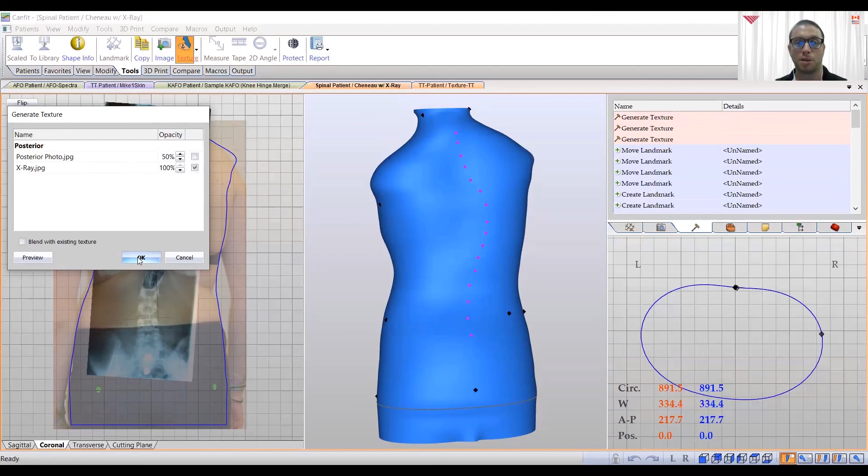I'll select the X-ray, check this box to accept, and click OK. It will take that X-ray image, paste it, and project it onto the shape, effectively tattooing it there so you have that as you move the shape around and as you modify it. Now I can see where the spine is in my patient, who has scoliosis.

Obviously we can use this to guide modification. For example, if we want to do any bending, translation, or shifting of the spine, we can use that as a reference. So here I can use translate.

I select my areas for the modification, and that purple line in the middle is the apex. Then I select the direction—in the axial view, going left to right. Then I just pull this as far as I think is clinically appropriate.

You not only have the ability to adjust the apex of that modification, you can also adjust the curvature here—the blending between the apex and the boundaries of the modification. This might give you an idea of how much to modify so you get the appropriate impact on the shape.

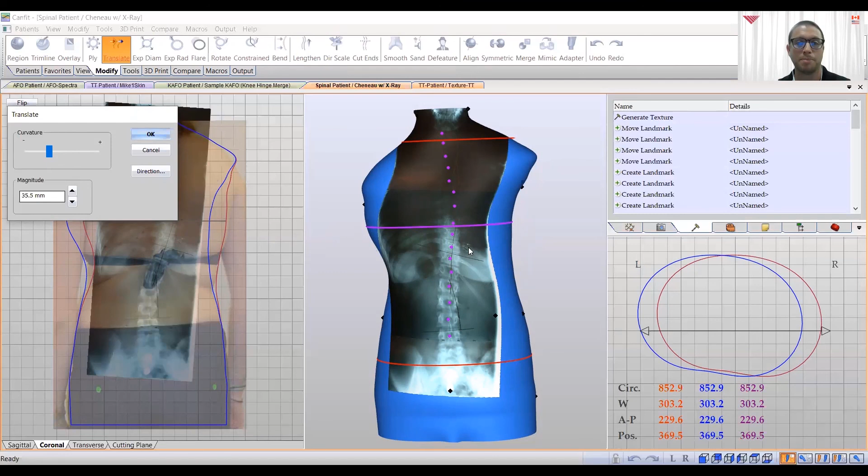For all the shapes we've designed today, once you're happy with your final design, we output it to whatever machine we're carving on. For a 3-axis carver or robot, we have output options here, or we can send it to a 3D printer or STL file—those are all available in this window.

Here we'll recap some highlights of the CanFit design solution. With CanFit, you can do more in less time, through the use of overlays, trim lines, and the macros as we saw.

It's accurate and repeatable across staff. When all your practitioners use the same macros and overlays, you can be sure you'll have repeatable and accurate results and consistency for your patients.

The software includes the ability to do reporting. This can be something you share on progress with the patient, or as a report for justification for third-party payers.

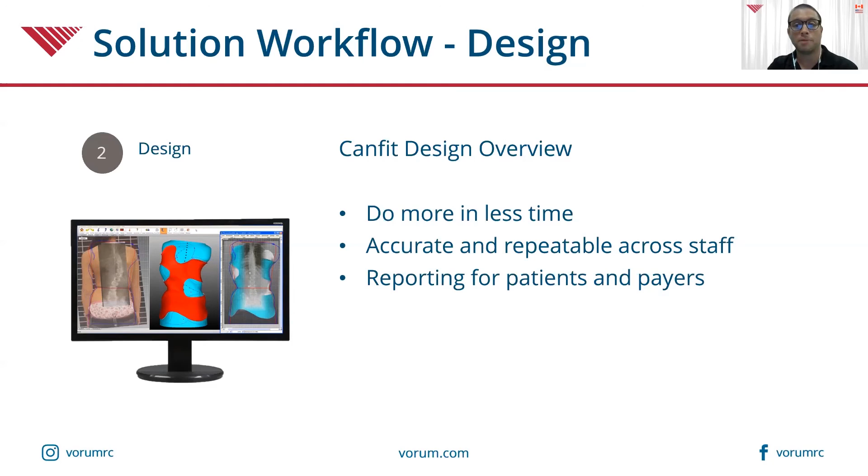We make the regulatory part easy, so you don't have to worry about patient privacy. We can work with you to make sure you're achieving your goals around HIPAA compliance.

And as you saw, all of the modification tools, including the 3D printing design tools, are in that single solution, so you don't have to skip back and forth between different software programs to achieve your 3D printing designs.

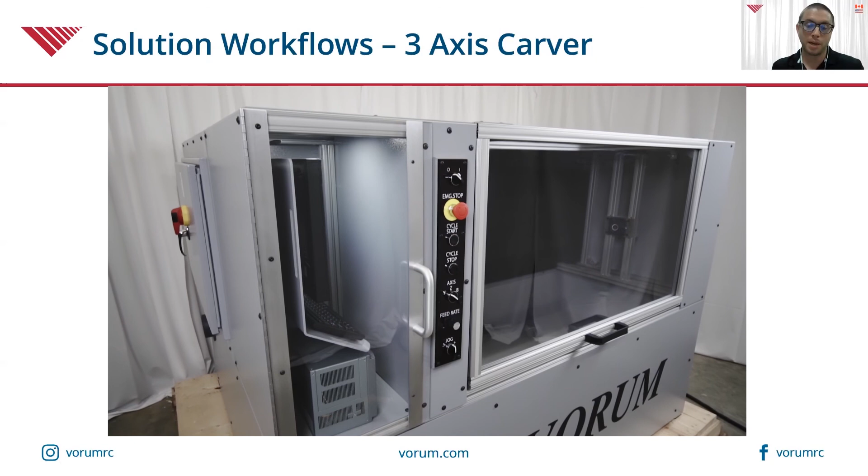Now we're getting to the last step of the CAD/CAM process, the carver. I'll highlight two solutions here today, but we also have other carvers available, for example for direct milling of foot orthotics. Here is Vorum's 3-axis carver.

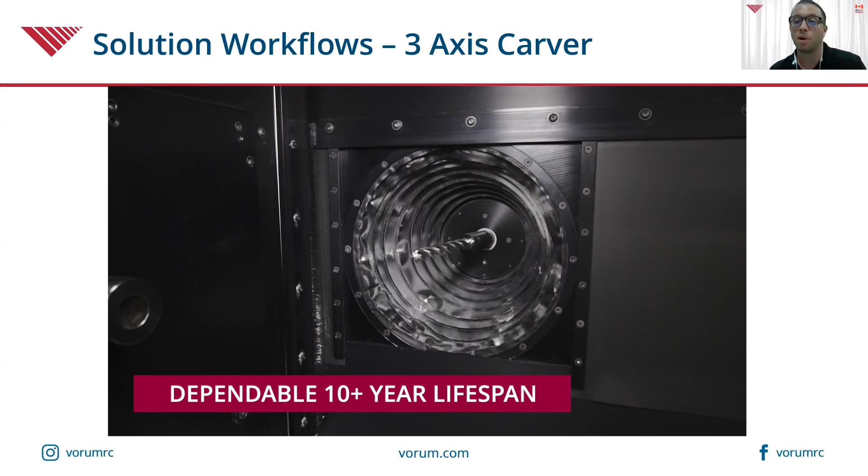This machine is a workhorse. It's easy to use and fast to carve. It has the largest carvable volume in the industry, so you should almost never get into a situation where your tech says the patient shape is too big to fit. It's very dependable and can handle any type of shape from head to foot.

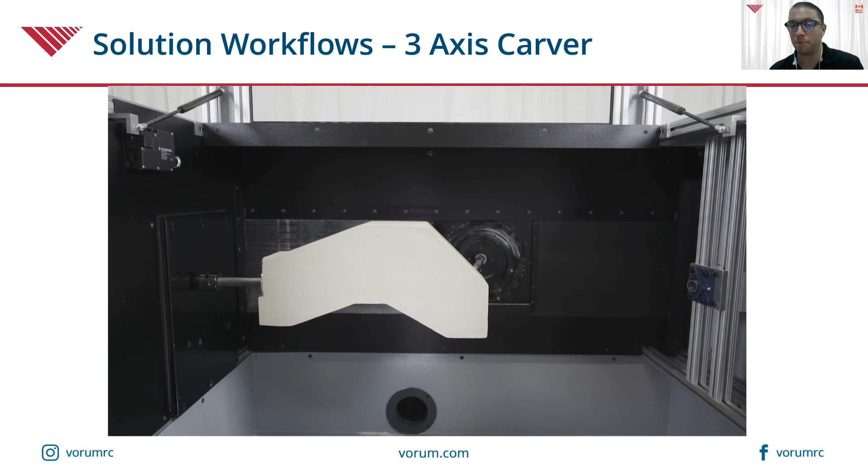To save time, you can carve multiple shapes in one block. You can also reuse blocks, carving smaller shapes within previously carved jobs, bringing your block costs way down.

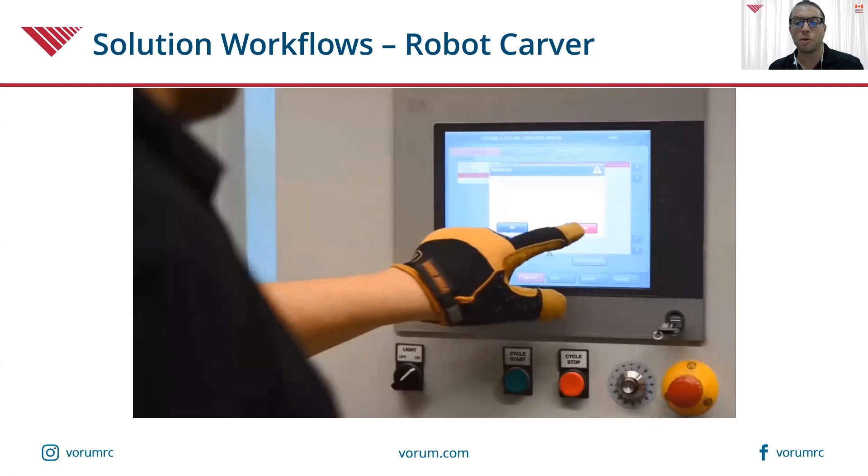Next is Vorum's robot carver. We have integrated the strongest robot arm in the industry to ensure we can carve fast and with optimal surface finish, so you can spend less time touching up the shapes before fabricating the device.

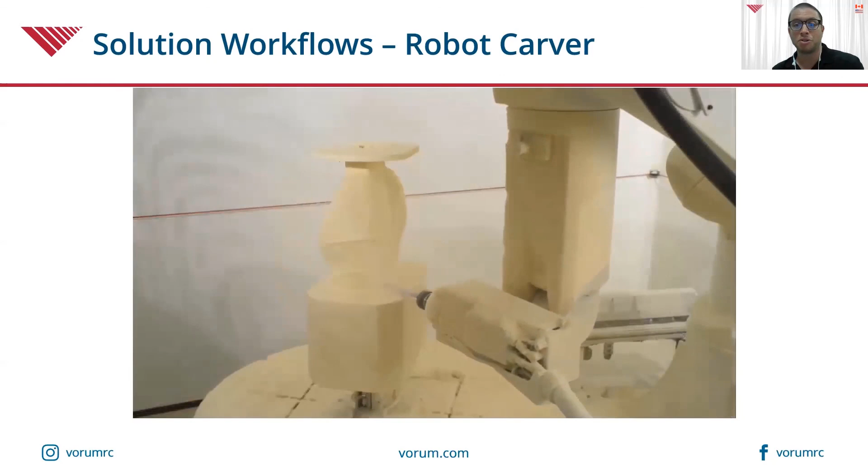Our CAM software has been designed with O&P technicians in mind, so you don't need to hire an engineer. The carved toolpath files are generated in only a few clicks, and users can fully simulate the carving before sending it to the machine, so they know exactly what they're going to get out of the machine.

Because of the 7 axes working in concert, the tool can reach those areas the 3-axis carver can't. So it's ideal for carving complex AFOs and KAFOs. It can also carve custom wheelchair seats and insoles.

3D printing is the alternative to traditional CAD/CAM in O&P. A lot of advancements in this industry have been made possible with new printer technology as well as new materials. Vorum is excited to be working on a solution for 3D printing with Essentium.

The O&P edition of their HSE printer is brought to you exclusively by Vorum. We are currently working through patient trials with industry partners to ensure we have the best possible strategies nailed down. This process was certainly slowed down by the COVID-19 pandemic, but once we've completed those tests and confirmed the optimal printing strategies, we will let our customers know how they can get started with this exciting technology.

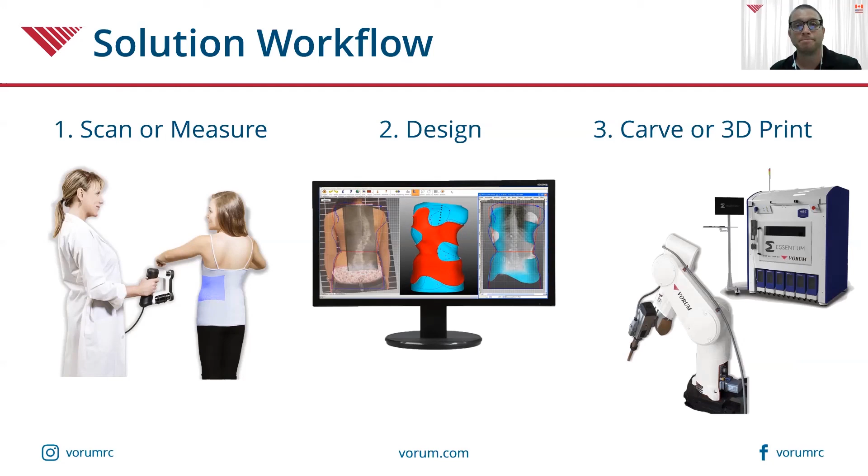Thank you, Chris, for a wonderful product overview. The deeper understanding of the power that our products have helps to better understand what's behind the success stories that Brian was talking about. When you can find ways to automate your workflows and you have a scanning technology with an accuracy rating of 0.1 millimeter, it's conceivable you'd see tremendous results when making the switch from plaster to CAD/CAM.

Not only that, you're just going to improve the patient experience and their outcomes. If you're providing them with a better fitting device in less time, that's just going to increase the overall satisfaction that patient has when receiving your care.

If you're thinking about making the switch from plaster to CAD/CAM, finding the right partner is critical. Vorum's been around for 31 years. We're a very established company and we've managed over 800 installations. We've seen competitors pop up and drop off over that time, and one thing's for sure, Vorum is here to stay.

Going back to SurePath, when there's a program in place to ensure customer success when making that transition, that's just going to alleviate any uncertainty when you're going through it. Bob had some great information around our remote training and remote deliveries. So any new customer thinking about making the switch, we're ready to go.